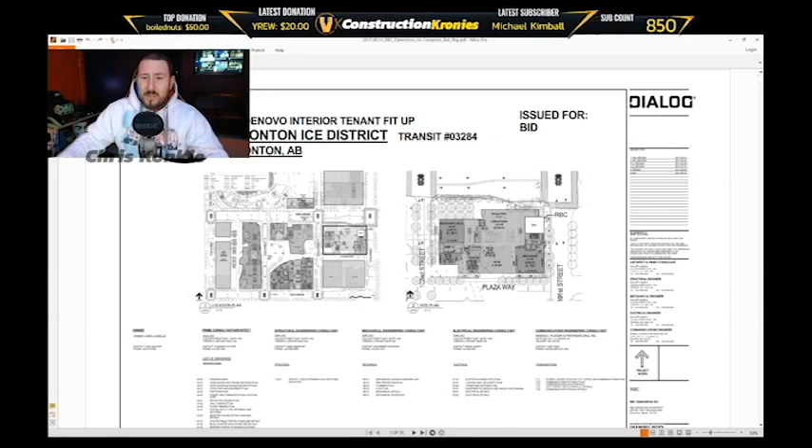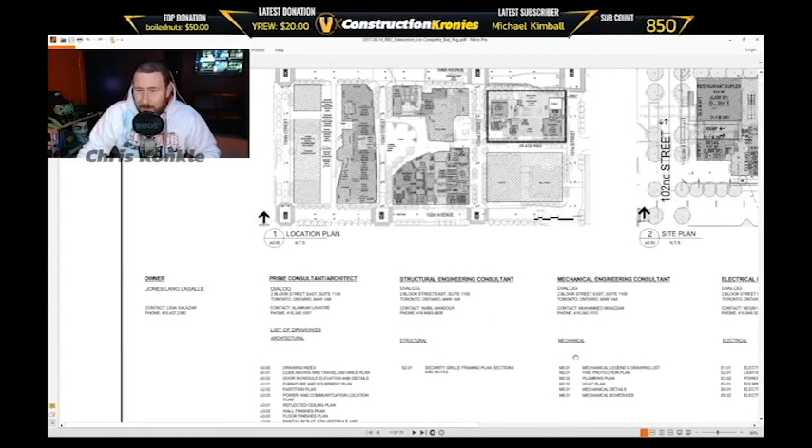Okay, guys, so really quickly, first thing you want to do is look at the cover page. This is the cover page of the drawings. On the cover page, you'll have a drawing list. Right away what you want to do is get into this list. You want to find what's relevant to you. So what you want is like the floor plan or the partition plan, possibly elevations, reflective ceiling plan. If you're installing doors when you're framing, like door schedule, things like that.

But right away, we want the floor plans, we want the wall types, so we can reference the two, right? So we go through here, drawing index, there's the door schedule, elevation details, furniture, partition plan is the same as a floor plan. So we want A2.02. So we're going to head over to the partition plan. We're going to keep looking just to see what's here. We have the reflective ceiling plan on A3.01. So that's an important one for drywallers.

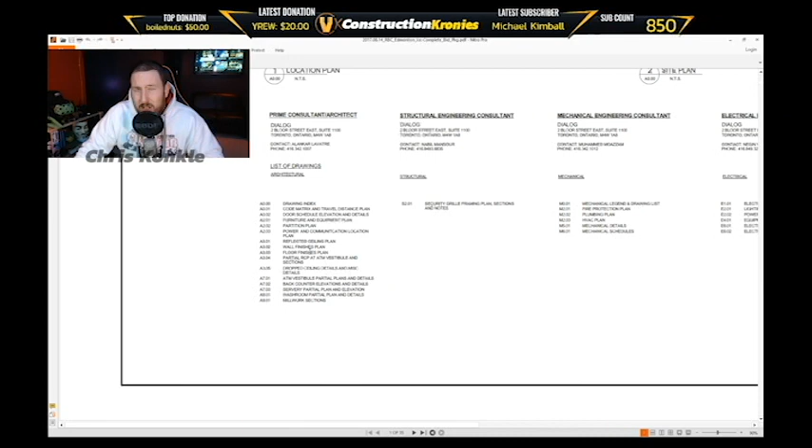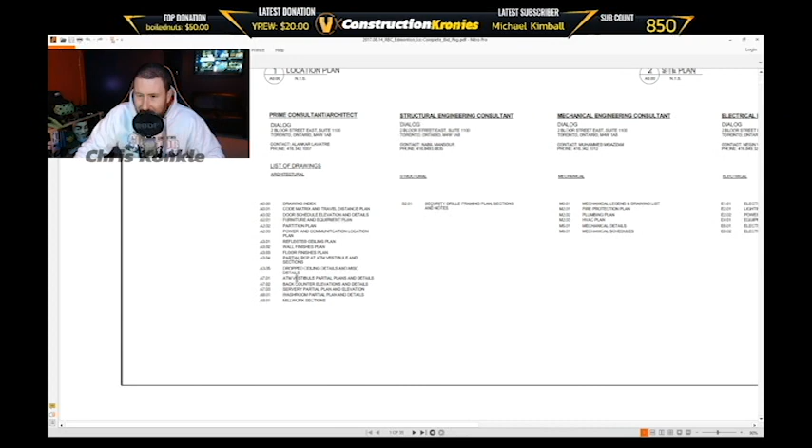Wall finishes is not important to us really. I mean, if there's something specialty, if you're a foreman, you're gonna want to look at this. But just for a drywaller, you're not gonna want to really look at that. You want partition plan, reflective ceiling plan. And then let's see here. So partial RCP vestibule sections. These are like cut throughs, drop ceilings, details and miscellaneous details, ATM, vestibule, partial plans and details. There's elevation, servery, washroom, millwork. Okay, so really all we care about in this is the partition plan.

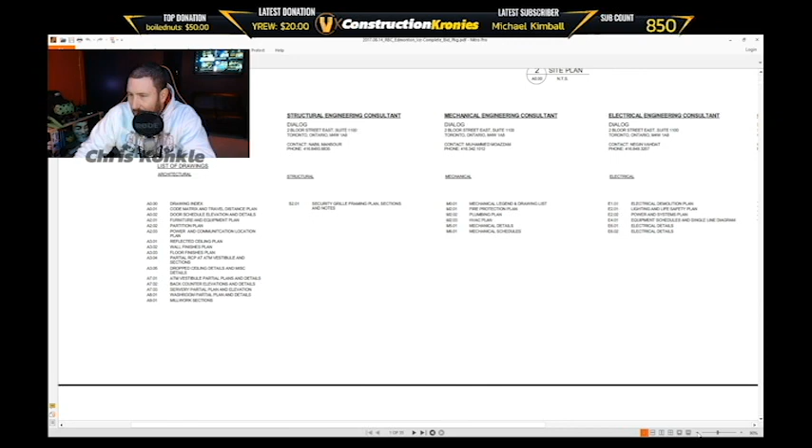There should be some kind of specification that shows you the wall type. So I'm going to zoom out. Remember, so it's A2.02. A stands for architectural. You'll have like M for mechanical, E for electrical, and so on, right? So A is for architectural drawings, and these are your numbers, your page right here, okay? 0.00. You're also going to have the title of the page right here. So it is the drawing index.

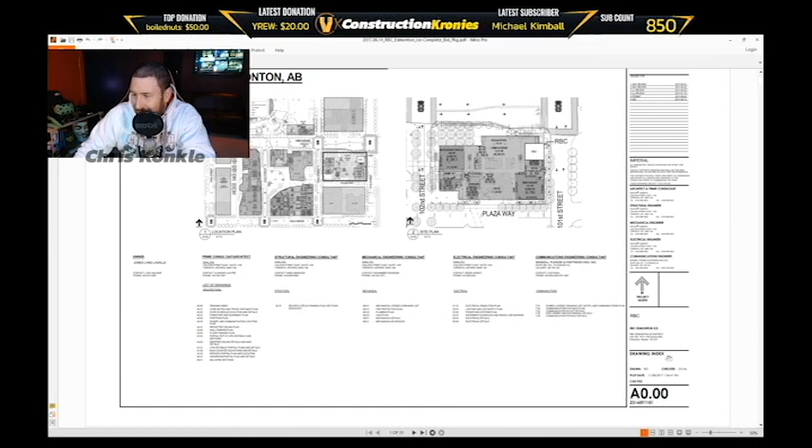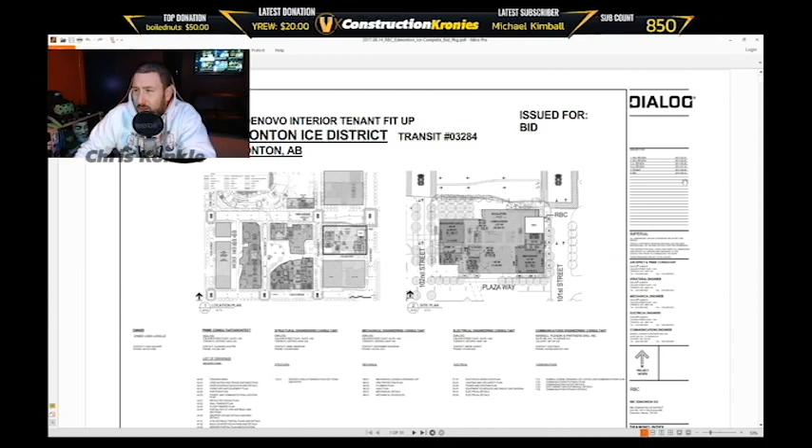It should say issued for construction somewhere or issued for tender right here. Okay, so issued for 50% review, 90% permit. So it's only at bid stage. So this is the bid drawings, for tender, right? There will be issued for construction drawings coming out after these. But carrying on. So you can just look at the page right here.

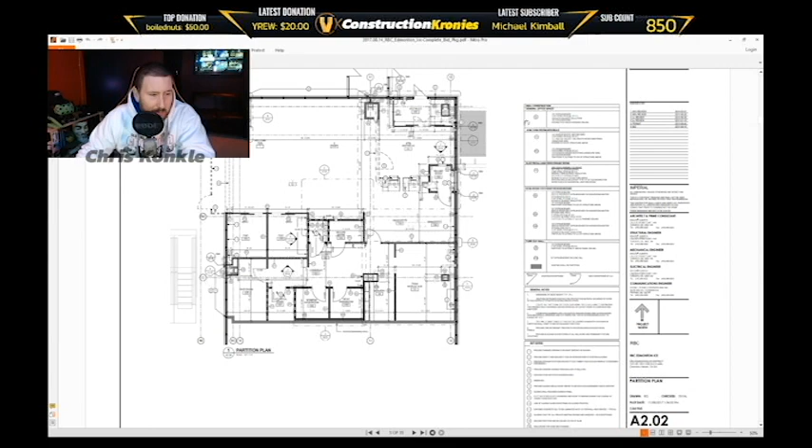So code matrix, we don't really care about that. Door schedule, unless you're steel stud framing, you're not really going to care about that either. Furniture equipment plan, yeah, not your thing. But A2.02, the wall types are right here. You see the wall types where my hand is here. We're gonna zoom in on the wall types right away and take a look at the wall types.

So P1, you have 1/2 inch gypsum on 3 5/8, 16 on center. It's acoustic, blanket insulation, and then 1/2 inch on the other side. Extend to 6 inch above finished ceiling, right? So remember that. You want to reference the reflected ceiling plan to get the elevation to let you know what size of sheets to use.

Okay, you take a look here. So there's gypsum, extend to underside of structure. So it's plywood on the other side. So we worry about that one side only. 1/2 inch gypsum, 1/2 inch gypsum on plywood.

You have 5/8 type X, right? Type X is important because it's fire rated. 3 and 5/8 mineral wool is like Roxul, right? So it's semi-rigid. And then 5/8 type X on the other side.

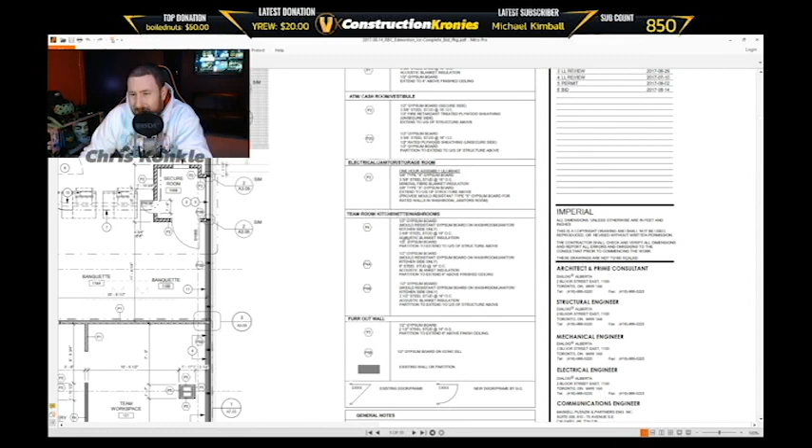It's important to look at the insulation as well, so that if it's not done properly, you don't seal up the walls, right? You can easily tell the supervisor on the job, hey, you know what, there's where there should be Roxul or semi-rigid, right? Then it's a simple fix. And then nobody dies in a fire when everything burns down.

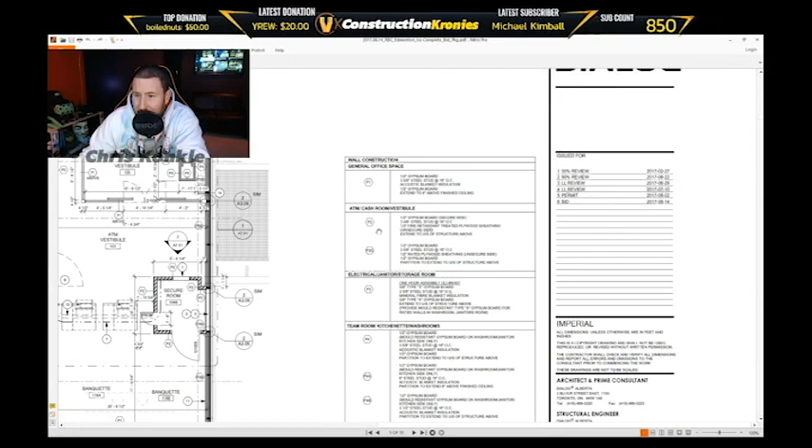So yeah, look at this team room kitchen. This is even nice. This is all broken down by room, which is really, really nice. Team room, kitchenette, washrooms, half-inch, half-inch. So you get my point, right? So you get the wall types here: P1, P2, P2C. Really simple. Okay, P1 right here. This is P1. You obviously know where you are, right?

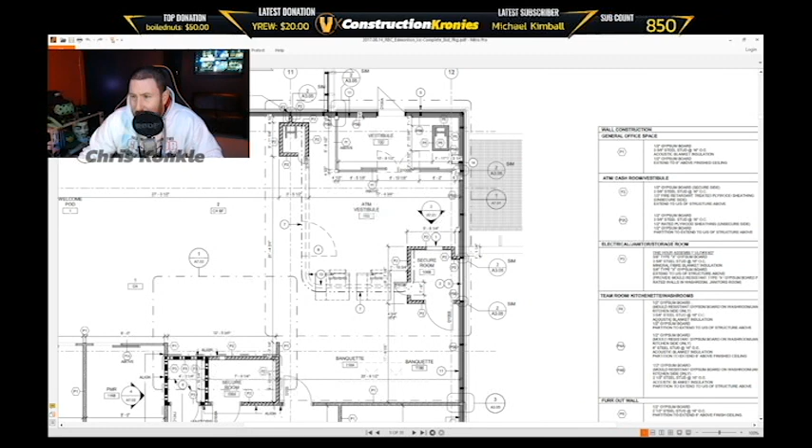And I'll go over this in another video on how to read it for steel stud framing. But for drywall, it's simple. You're like, oh man, I'm in the vestibule. What type of drywall goes on here, right? So you go, oh, it's P1 here, P1, all the way here is P1, and then you got P5 on the exterior, right? And P5B over here.

So we're gonna go look at P1. So half-inch board, right on. Extend to 6 inch above ceiling finish. Oh man. So what's the ceiling height? All right, so it doesn't really say here. So we're going to jump over to the reflected ceiling plan real quick, which I forget the actual code, but we'll get there. Yeah, reflected ceiling plan is A3.01.

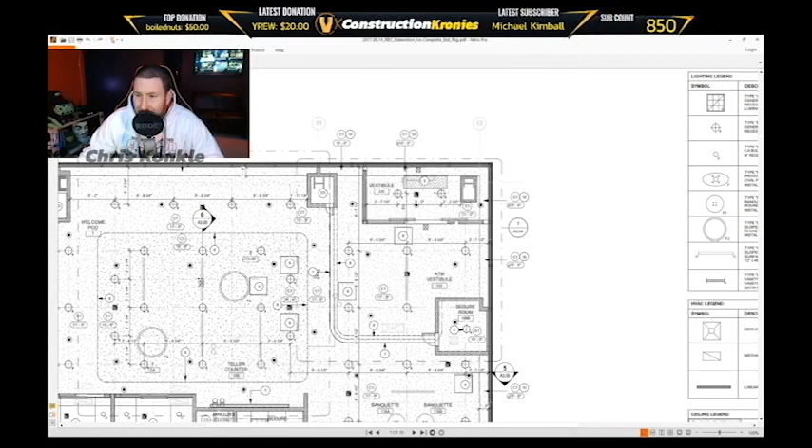We're in the vestibule, right? So we're going to zoom in, get over here to the vestibule, and look, 11 foot. Okay, so the ceiling height in the vestibule is 11 foot. It's a ceiling 1, and the height is at 11 feet. You see that right there? You also want to know the ceiling plan, because when you're drywalling ceilings, it's gonna tell you which ones to drywall. So C1 is a drywall ceiling as well.

So gypsum board ceiling, height as noted on plan, and ceiling tile and suspension system. So that's T-bar, exposed, right? So you get what I'm saying. So C1s, you got drywall, and you can also tell by the color. See how there's dots all over? That just indicates a C1 as well. And they do that same with the walls, right? See all the diamonds here? It's gonna be the same wall type.

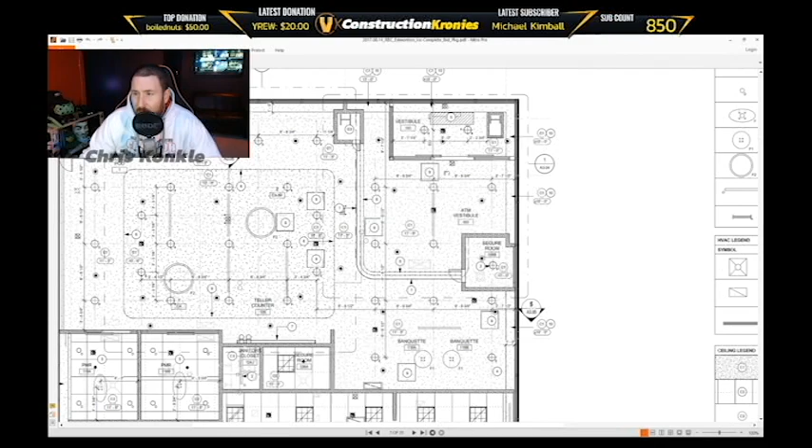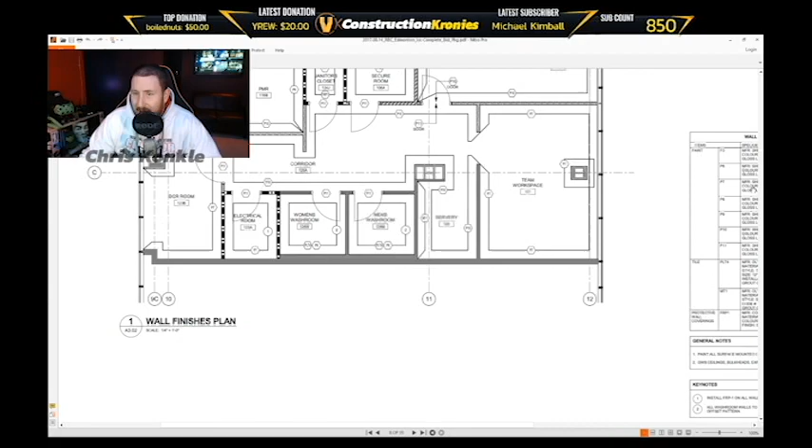Okay, so this isn't a huge drywall job, right? This is just a TI, a tenant improvement package. But I thought it was a simple plan to show you guys. So it's important to know just those simple things. That's all you really need to know as a drywaller. You'll get into things like specifications and details at a later time. I'll get into more detail with that.

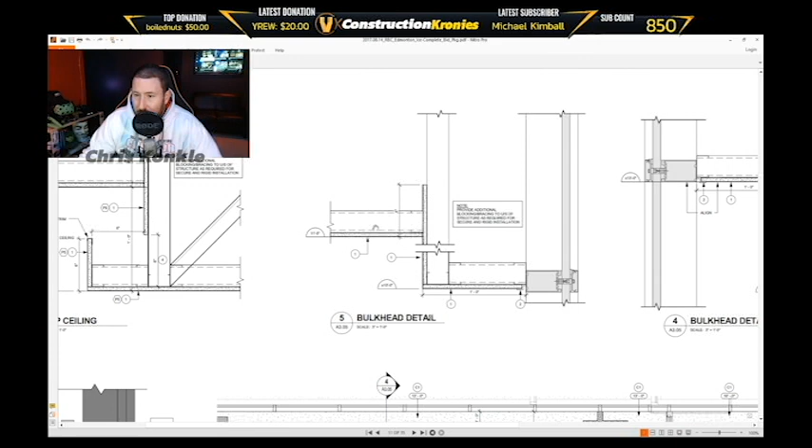And you always do this when you're drywalling, by the way. You finish your seams at the top, right here, not underneath. That's just better for taping, and it won't flash through, right? And it tells you right here, it wants the drywall all the way up. So that also tells the framer at the same time that he or she has to drywall behind the framing. You can't just seal it up. It can't be steel to steel. And that's what the details are important for.

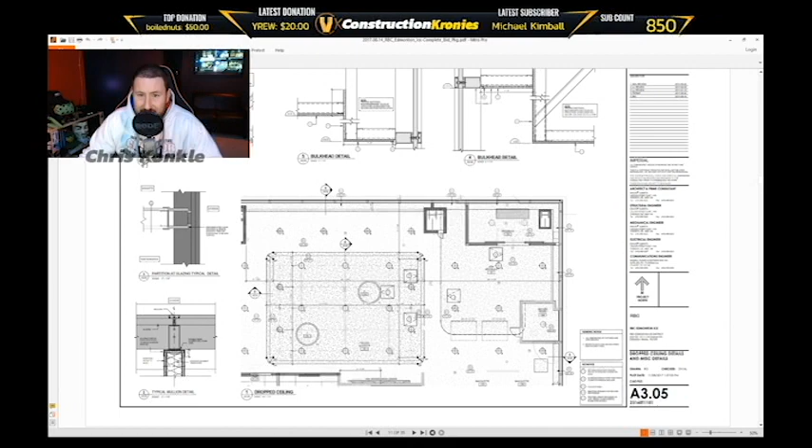So if you have certain bulkheads, you can reference them by these numbers here. So 6 on A3.05. Okay, you get that? See, A3.05, and this is detail 6. Let's see if I can go back to the floor plan real quick and reference that for you. Or the partition plan, sorry.

All right, so the partition plan is right here. Remember, we looked at the vestibule, right? So the vestibule is right here. We now know it's 11 foot, so we can drywall 11 foot 6. So we're gonna need 12 foot sheets in there, right? So if it says extend to 6 inch above finished ceiling, and you have 12 foot sheets, and you have 12 foot of stud, put 12 foot sheets up and don't cut them, right? Just put full 12s up all the way around.

And then the ceiling will get framed in, and then you'll drywall that or whatever, right? So that's how that goes. So you'll need 12 foot sheets in here, right? So they want your drywall to be at least 11'6". There's no point in cutting 6 inches off unless it's no higher, right? If it's higher than 12 feet, which I'm assuming it probably is, you could probably look on the building elevations, but I'm not going to get into that right now. That's how that works, right?

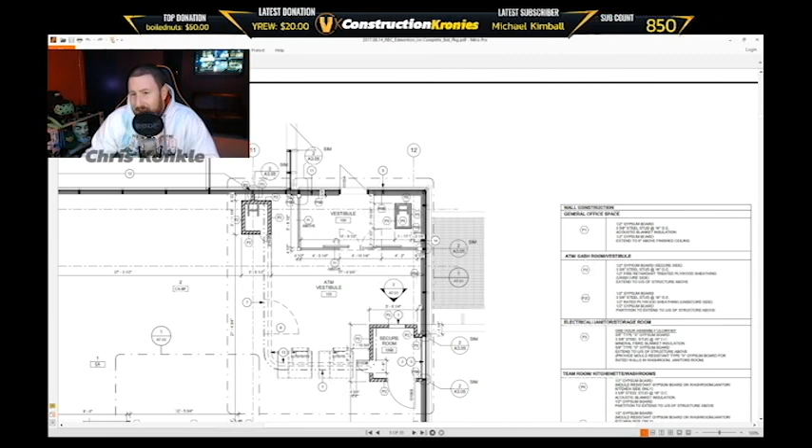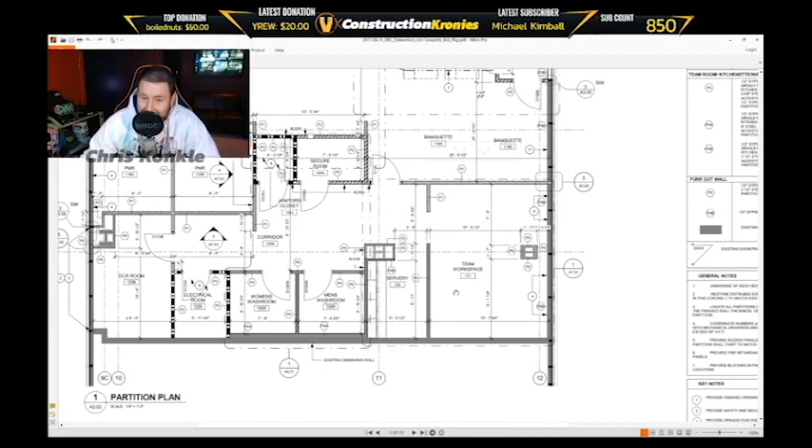So details come out like, here's details right here. So 2 on A3.05, right? There's a detail for that right there. Which one were we looking at? 6, right? That bulkhead. So that's detail 6. Detail 5. It should be around here somewhere. I don't know if it's on. It might not even be on this page necessarily. It could be on the other pages, but you get the idea, right?

This is how you also read details. So you see this, it's like a bubble. It's a cut, right? And this is what it is. It's detail 1 on this page, right? So you go there and you look. There's also other things called cuts where you can check the side through cuts. But yeah, that's simple as that, guys. Just wanted to teach you guys drawings a little bit. This is how a drywaller would see the building.

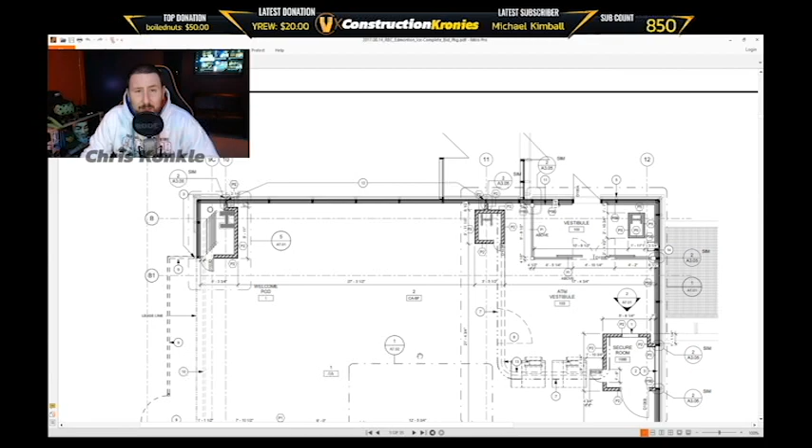So first thing you're going to do, let's recap, is look at the front page. If the drawing list is not on the front page, it'll be in the first page or 2. It'll be really close. A lot of drawings have them on this main page right here, and you only care about the architectural drawings as a drywaller. So structural drawings, right? Drawings that start with S are structural, M mechanical, and E electrical, right? T communications. So you know what I mean? That's what I meant by that. So the architectural drawings are listed by A.

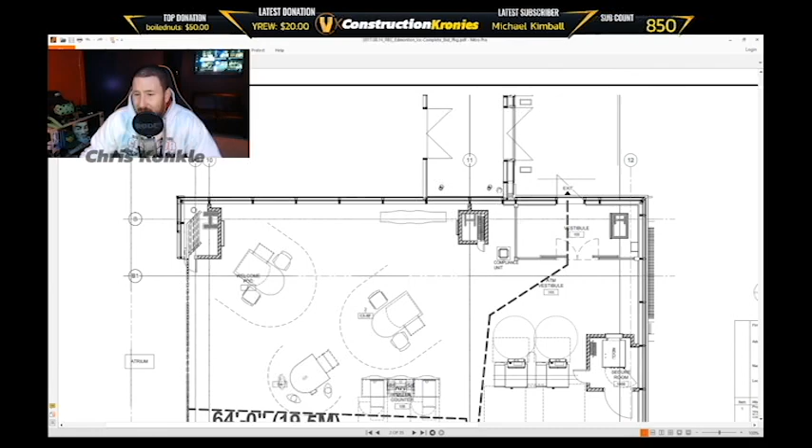Make sure you have the right drawings. So if you're in bid stage and you have the bid drawings, that's a good thing, right? If you got the permit ones, maybe not so good, but if you see bid and you're bidding and the date's good, you're good. If you're in construction stage and it's a bid package, then you should actually ask the question: are these good for construction? They may have a stamp on them you might not recognize. But if you're on site building and it says bid, then maybe ask if the issued for construction drawings were ever issued, and if you should use these drawings, right? Because there could be a lot of addendums that would have altered the original drawings.

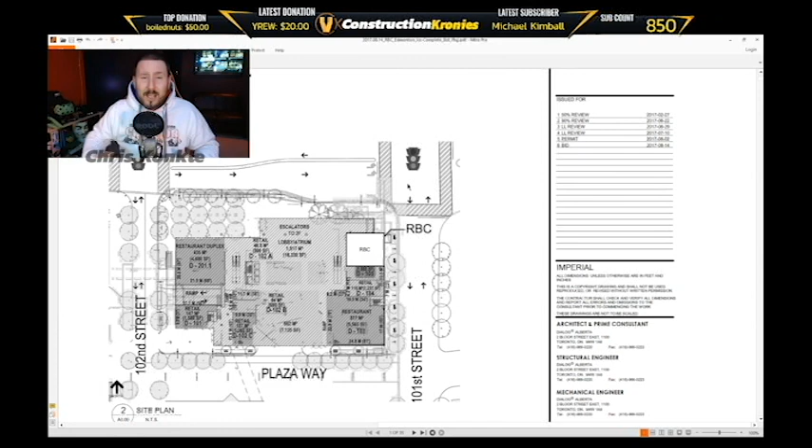I've been dealing with drawings for many years as a foreman and on site doing layouts, and as a builder myself as a subcontractor, general contractor, project manager, estimator, all of these things. So I have a really good understanding of the drawings. I was showing you the imperial drawings right now, but I can get into the metric, and then we can even get into conversions, all that kind of stuff too at a later date.